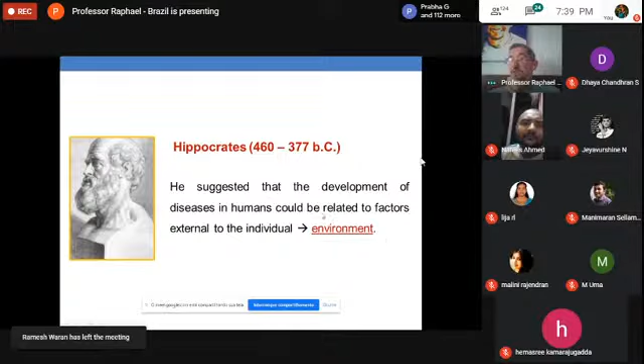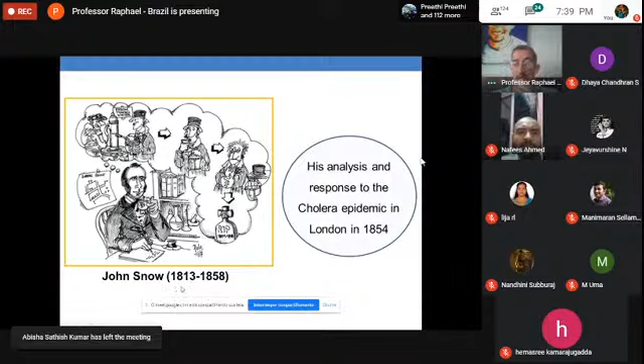After that, we have John Snow in England, and his analysis and response to the cholera epidemic in London in 1854. He's the father of epidemiology, and his hypothesis was that during the cholera epidemic in London, the Broad Street pump, the water pump in the middle of the city, was contaminated. It's important to note that in the 1850s they did not know about microorganisms, but with all his study he could suppose, as his hypothesis, that the water was contaminated by something.

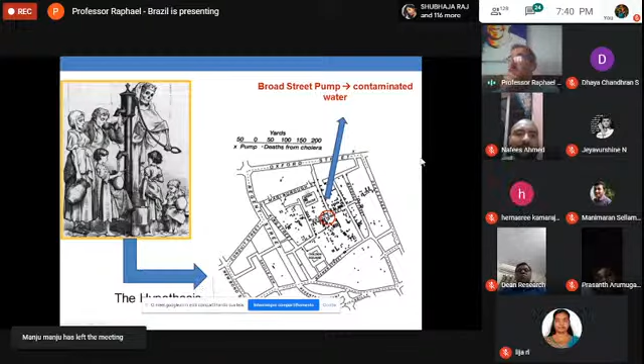With that, what we got is some epidemiology studies, and multiple factors like environmental, social, and economic ones are related to a lot of diseases.

In the world, there are more than 2.5 billion people who do not have access to sanitation, and of this, 71% live in rural areas. As a result, we have a lot of waterborne diseases that affect mainly the poor regions of the world, for example in Latin America and South Asia, including indigenous and rural populations.

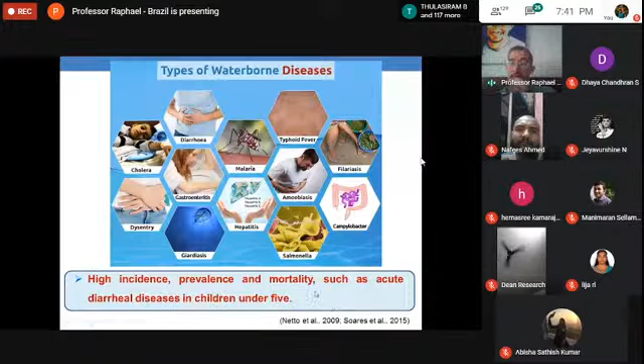All these things, the poor sanitation and no access to water or wastewater treatment, result in a lot of types of waterborne diseases, like diarrhea diseases, cholera, gastroenteritis, giardiasis, and so forth. These have high incidence, prevalence, and mortality, such as acute diarrhea diseases in children under 5. The waterborne diseases affect mainly children under 5 years old.

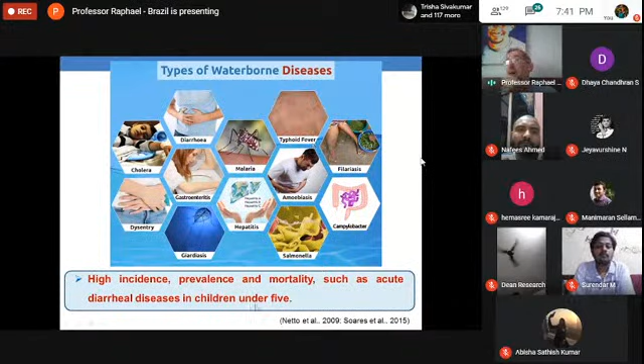Researchers say that waterborne diseases have physical, economical, social, and environmental impacts for the entire community, as well as chronic impacts on children's mental and physical development. For children under 5 years old, these impacts are very important. So this is the more important thing about water treatment.

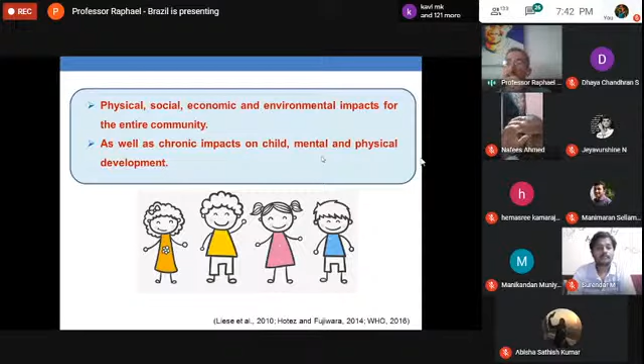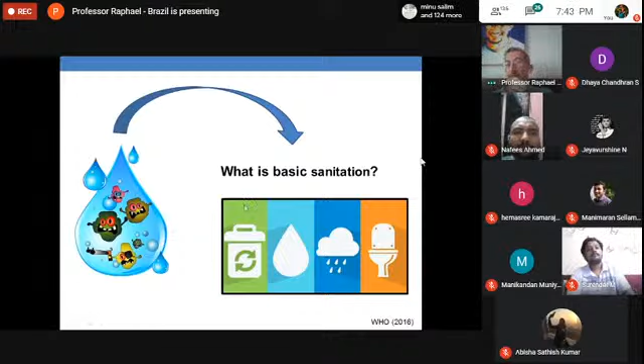The access to secure water, in quantity and quality. So what is basic sanitation? Basic sanitation has four things: access to water, wastewater treatment, access to drainage of rainwater, and access to solid waste management. All these things are fundamental to good health and to social and economic development.

So adequate sanitation with good hygiene and safe water, what we call WASH. The World Health Organization said that these three things, sanitation, hygiene, and safe water, are important for all people. They are human rights. That is the most important thing to know - sanitation, hygiene, and water. They are human rights.

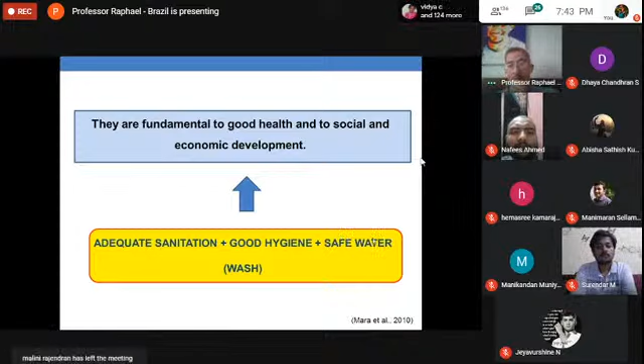So an ideal solution to problems related to waterborne diseases is access to water. This access to water needs to be universal, cheap, safe, and constant.

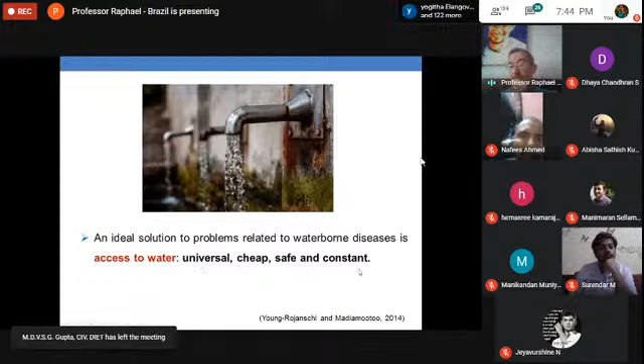So we focus on more simplified and viable technologies. This technology needs to be economically, socially, environmentally, and culturally suitable in rural areas, as communities are smaller and households are far from each other. So we have like 4 or 5 or more technologies that are viable for this kind of community.

So the priority purpose is to find a technological solution for household water treatment that is suitable, sustainable, and can be maintained by their users with little technical support. Why is this important? Because we do not want the technological solution to be abandoned in the future.

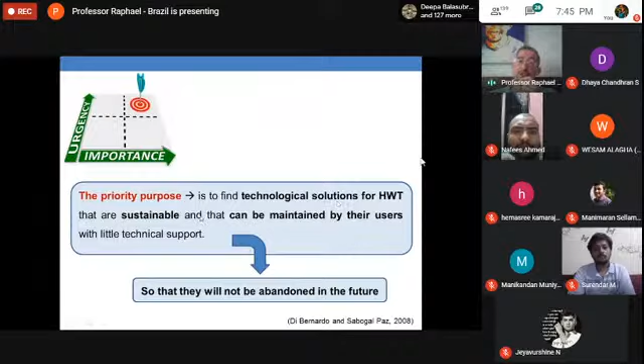Why do we say that? Because we have a lot of technological solutions where the solution is so complex that the user does not use it, so they abandon the technology. So for us, that is not important, that's not good. We need a technological solution to be sustainable over time.

The second part is the slow sand filter, a theory about that. Among the widely accepted technologies for water treatment in small communities is slow sand filtration. This slow sand filtration originated in Britain in the 19th century and was widespread in Europe and America.

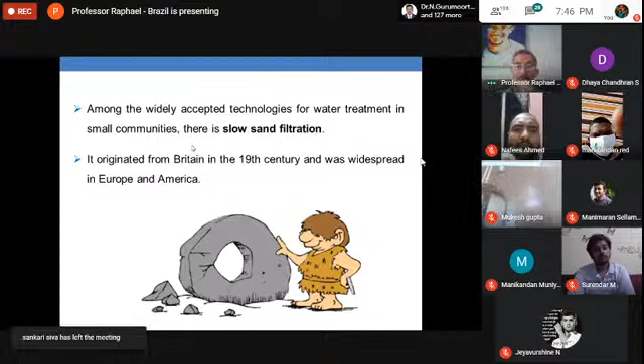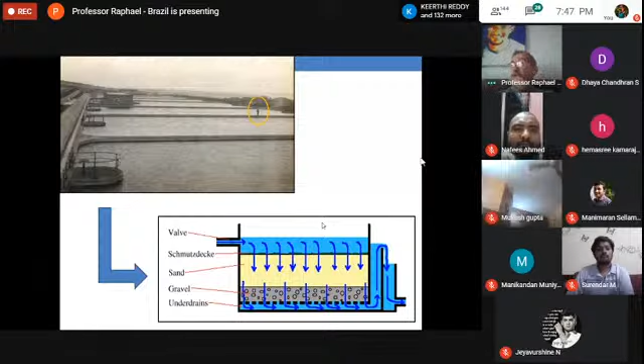Here we have a picture on top. The slow sand filters are big because the flow rate is very low, but it's very simple to operate, and the slow sand filter can bring us very good treated water quality. At the top of the filter we have the Schmutzdecke, a biological layer, and the raw water comes in at the top, flows through the sand, the gravel, and the underdrains, and goes out treated. So it's a very simple technology that can be used for small communities.

The advantage of this slow sand filtration: it has a 0.6 to 1 meter bed of sand used to improve the quality of water with removal of turbidity and pathogens mainly. It has simplicity of design, construction, operation, and maintenance, and it is capable of promoting effective removal of pathogens and particulate matter, especially due to the trapping in the smaller sand grains. The sand has very small grains, so the pathogens become trapped inside the sand grains.

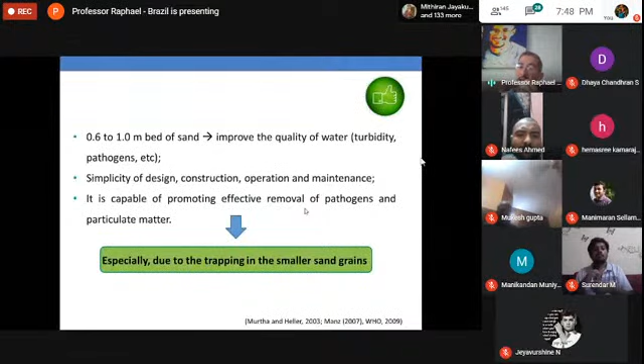Some disadvantages of this technology: it requires good quality raw water, sometimes we need pre-treatment steps. The flow rate is very low, 0.1 to 0.4 cubic meters per square meter per hour, so for a big population it needs a large area. But for smaller communities, this technology is very important.

We usually need days to weeks to develop the biological layer, called Schmutzdecke. Consequently, we need to improve the efficiency during this period of time. We need to know that slow sand filtration is like 90% biological, so the microorganisms in the biological layer need time to improve the efficiency of the filter.

Community scale systems are technically more complex, more professionals able to implement, and cost more, and also require a high degree of cooperation among individuals in the community. So it's a technology that can be used at community scale, but it requires a high degree of cooperation.

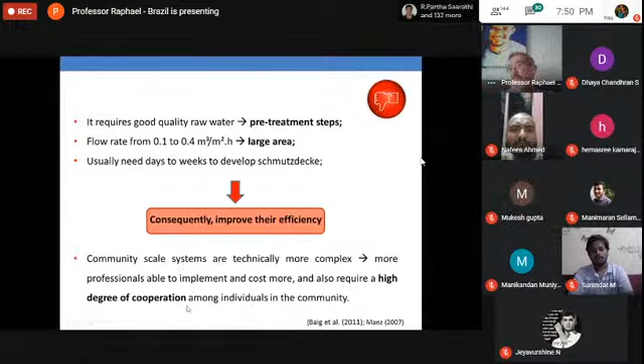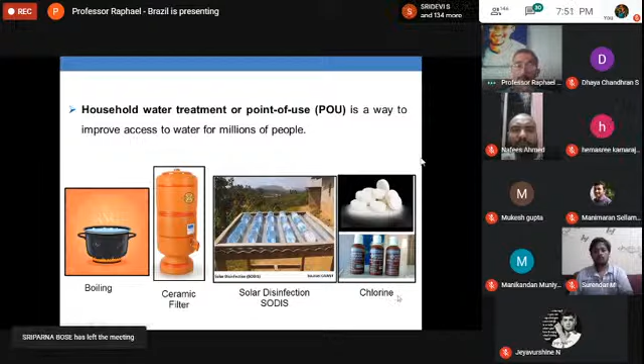Another household technology is the household slow sand filter, called the Biosand filter. The Biosand filter is an intermittent way to improve water quality, and it's very similar to slow sand filtration. The Biosand filter was first constructed by Professor Manz in the 90s, a professor at the University of Calgary in Canada. He brought this household slow sand filter.

It's very simple: we fill the filter with raw water, the water passes through a diffuser plate, then through a column of sand and gravel, and goes up to an outlet pipe, and the water is treated.

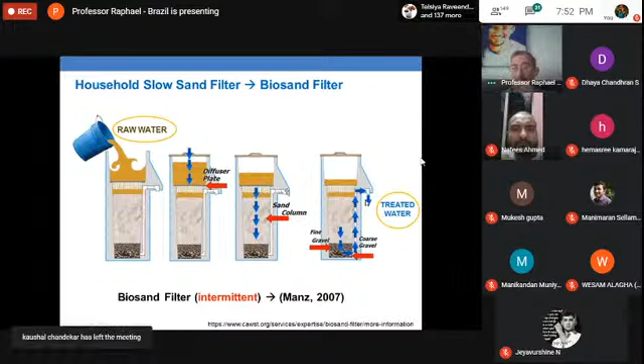What are the mechanisms acting for pathogen removal? The first one is predation: in the top of the sand column we have a biological layer, so we have predation there. We have trapping, because some pathogens are larger than the sand grains. Some pathogens can be adsorbed - so adsorption. Some pathogens get stuck in the sand grains, and natural death, because here the pathogens do not have enough food or enough oxygen. So these four are the main mechanisms acting for pathogen removal.

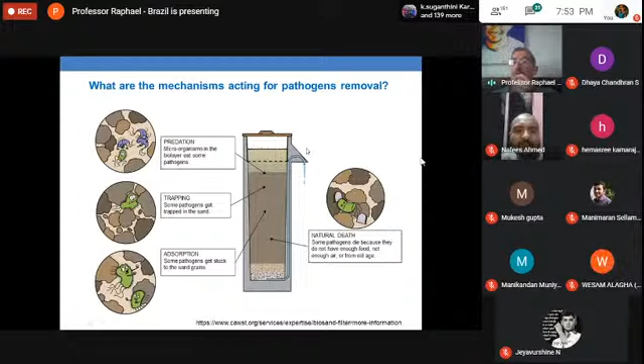So this is a slow sand filter with intermittent operation. The Biosand filter has a diffuser plate that protects the top of the sand and the biological layer from being damaged. At the top of the sand column we have the biological layer. We have filtration sand that removes pathogens and suspended solids from water, specially selected and prepared to treat the water well. This is the most important part of the Biosand filter - the filtration sand.

The grains need to be very, very small. At the bottom we have the separation gravel and drainage gravel to drain all the water and support it - the separation gravel prevents the sand from going into the outlet tube. We have the outlet tube here, and after that the safe water storage.

This part is very important too, because after the Biosand filter we have very good quality, drinkable water. But sometimes the safe water storage here is not clean - so the water is safe, but sometimes the storage is not safe, it's unsafe. So this container used to store the treated water needs to be very clean, so as not to contaminate the water again.

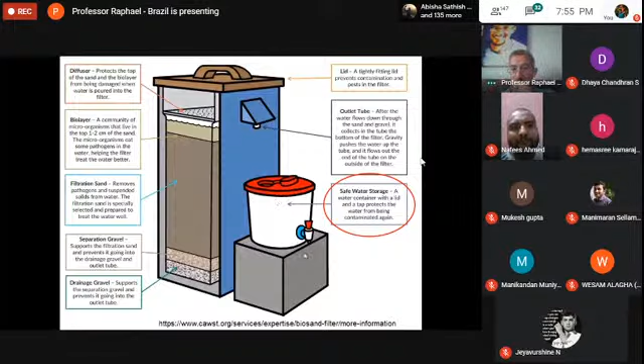The Biosand filter treats domestic water at 20 to 60 liters per day. It contains about 0.4 to 0.55 meters of sand above a gravel under-drain.

For practical household use, it's important, as Professor Manz designed, that the total height of the filter makes it easy for any adult to fill the Biosand filter with water. The outlet pipe collects water below the under-drain and extends along the filter wall until approximately 5 centimeters above the media surface, so the filtering bed is always kept saturated. A diffuser plate above the water level protects the biological layer from damage.

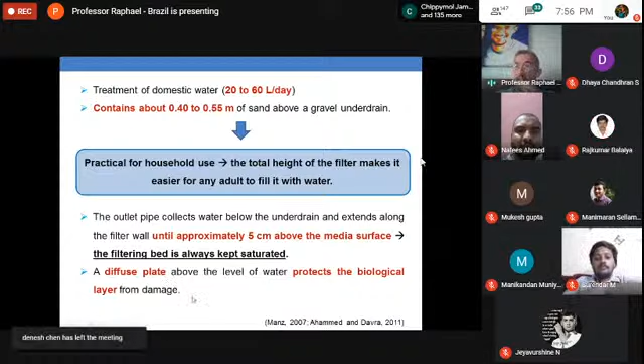The advantages of the Biosand filter: construction with local and simple materials, low cost. Here in Brazil, the cost of the Biosand filter is about $25.

Affordable and durable, operation and maintenance economically viable, and can be carried out by the resident. This is very important. The Biosand filter can be built, operated, and maintained by a layman with few hours of training.

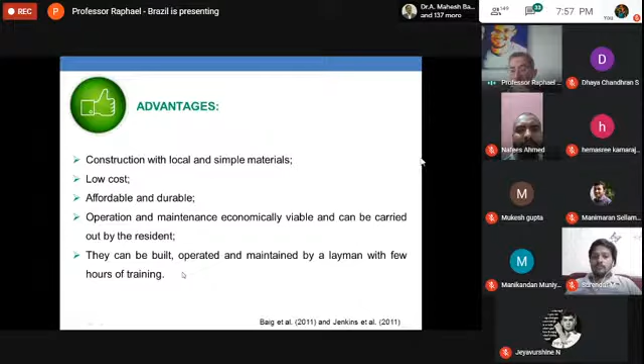Some disadvantages: the size of the sand grains affects filter performance, and sometimes it's difficult to find sand with the right grain size. A disinfection step is recommended, especially when the raw water presents high turbidity.

The presence of the biological layer formed in the first centimeters of the sand filter media is the same discussion as with slow sand filtration. So we have a biological layer here that needs time to mature enough to have good efficiency.

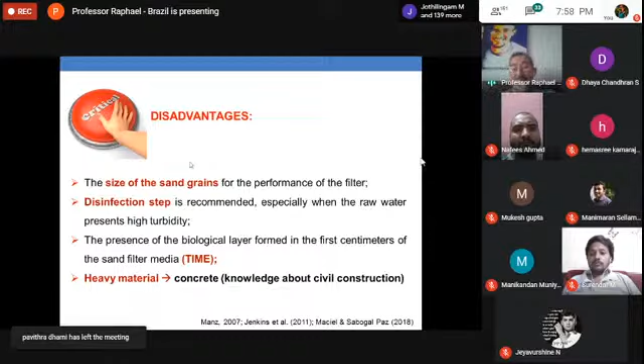Also regarding materials, Professor Manz made the Biosand filter in concrete, so people need to have knowledge about civil construction.

But here in Brazil, we have some studies on Biosand filter performance. There are 3 or 4 groups here in Brazil that work with this, and I brought some results that our partners have on the performance of slow sand filtration at the Biosand filter.

So, intermittently, we need to fill it with water 1 to 4 times a day. We have a maximum filtration rate of almost 10 cubic meters per square meter per day. The Biosand filter needs a pause period of a minimum of 1 hour.

The efficiency increases with temperature - this was a very good result - and it depends on the filter maturation. But the Biosand filter achieves turbidity below the value recommended by the World Health Organization, that is 1 NTU.

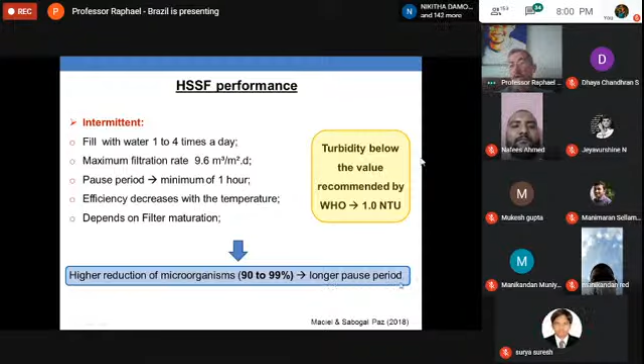When the Biosand filter is working intermittently, it has a higher reduction of microorganisms linked with the longer pause period. When the Biosand filter is working continuously, it depends on constant input and controlled water.

So here was a very important thing that we do here in Brazil: we can work the Biosand filter intermittently, or the Biosand filter can work continuously, receiving raw water continuously. This is very important too.

Continuously, it depends on the raw water quality. The efficiency also decreases with temperature, and it depends on filter maturation too.

The reduction of microorganisms can reach 99.9%, so this filter is more efficient compared to an intermittent Biosand filter. And regarding maintenance, when the filter needs maintenance, the filter needs time to recover its performance.

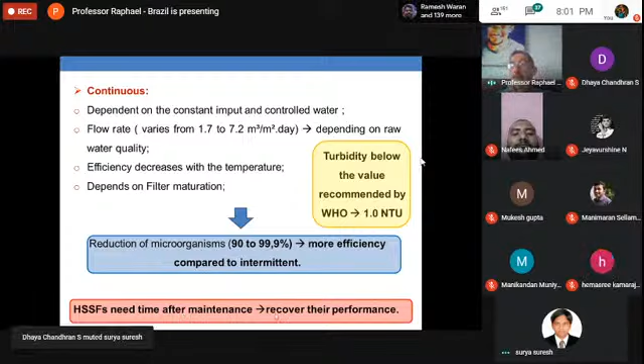What is filter maintenance? We have a biological layer on top of the sand bed of the Biosand filter, and when the daily production is not as desired, we need to clean the filter.

Here with my partners, we have two technologies of Biosand filter. We can put a non-woven blanket on top of the sand bed too. When we have a non-woven blanket on top, we just remove the blanket and scrape off the solids.

After that, we wash the blanket and put it again on top of the sand in the Biosand filter. If the Biosand filter does not have the non-woven blanket, we need to stir the surface area of the filter with our fingers, wait for the sand to settle for 1 minute, discharge the supernatant water, and repeat the process until the water is clean. So the maintenance is very important, and it's very easy to do.

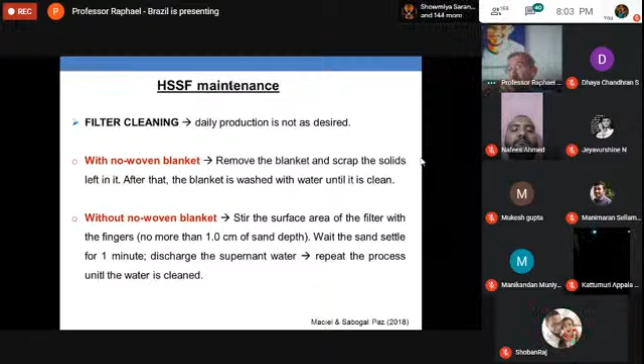So the Biosand filters have been modified. Our partners here in Brazil work with a lot of modifications, either to the construction material, the depth of the sand bed, or the sand grain size. So here we work with PVC pipes instead of concrete.

We work with PVC pipes and fittings, so it's very easy to get these pipes and fittings in hardware stores, and it's cheaper. We have some studies in fluid dynamics.

We have also worked on research with a plastic float valve to maintain the water flow rate through the filter. We have worked with different depths of sand bed, with non-woven blankets, and with different diffuser plates.

The Biosand filter has been part of research in intermittent and continuous flow, with different sources of water. Some studies use river water, some use groundwater. So with different kinds of water, the filter has different kinds of efficiencies, which is very important for research too.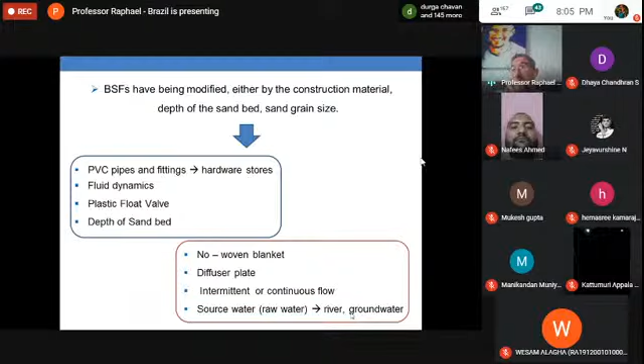But in the end, the filter works very well. One important thing about the Biosand filter is that it requires good quality water. In one of my studies, to improve the Biosand filter efficiency, we put in a pre-treatment step.

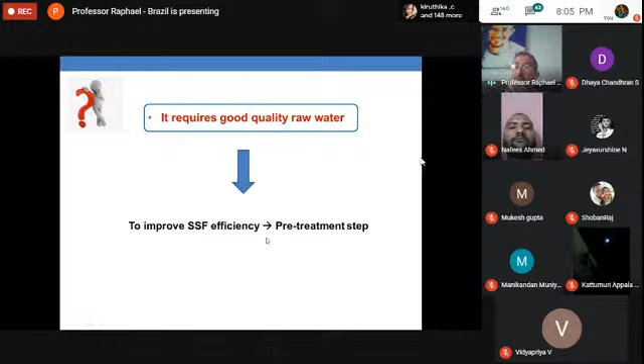So the last part I will talk about today is about household multi-stage filtration.

So what do we have here? Here we have the household slow sand filtration, or Biosand filter, with a pre-step using a dynamic gravel filter. This kind of technology works well, treating 25 to 100 liters per day.

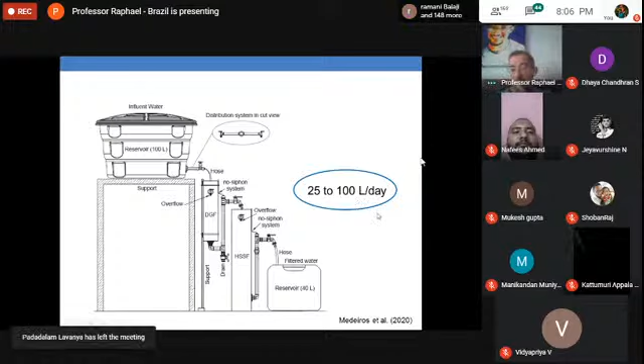The dynamic filter gets very good turbidity removal, E. coli and protozoa removal for this type of filter.

Here's a picture of the dynamic gravel filter. It's very simple: a PVC pipe with 3 layers of gravel - fine, medium, and coarse. On top we put a non-woven blanket. The water goes inside, flows through these 3 layers of gravel, and goes outside through the tap.

At the bottom we have a valve used to clean the filter media. It's also very simple to clean this kind of filter - we just close the tap, fill the filter with water, and open this valve. This cleans all the filter media.

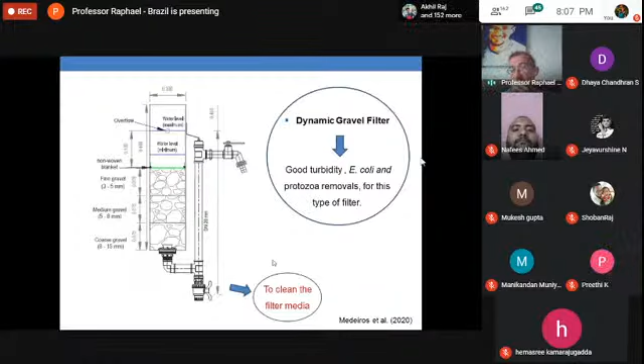So this was the pre-treatment step, and after that we have the slow sand, household slow sand filter, called Biosand filter. Here we have a fine sand - this is the most important thing, the characteristics of the fine sand: its size, the uniformity coefficient. These characteristics are very important.

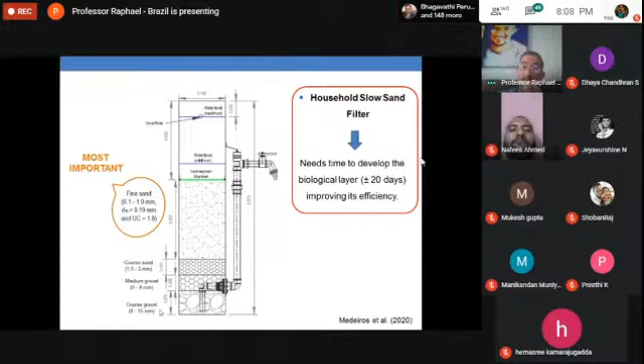This filter had 25 centimeters of height. After that we have coarse sand, medium gravel, and coarse gravel - these three layers are the support layer, just supporting the fine sand column. So the water enters and goes inside the filter, passes through the sand, passes through the gravel, and goes outside.

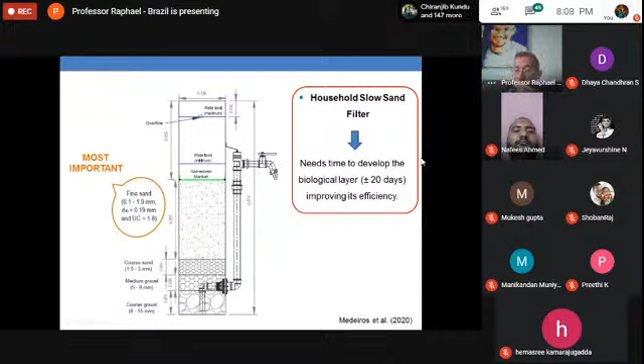So the results we got with the household multi-stage filtration: we got turbidity removal more than 60%, 1.5 log which is almost 99% of E. coli removal, and more than 99% of protozoa removal. We work here with Giardia and Cryptosporidium cysts.

The operation time is linked with the filter ripening parameter. The operation time influenced the E. coli and protozoa oocyst removals. The non-woven blanket acted as a physical and microbiological barrier, improving E. coli and oocyst retention and turbidity removal. So the non-woven blanket is very important to the filter - it helps a lot.

And the household multi-stage filtration with non-woven blanket is an example of a multi-barrier concept. What is this concept? More than one stage to improve water quality, with gradual removal of particles and microorganisms.

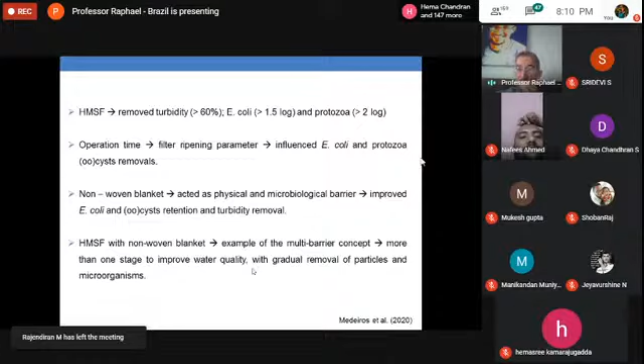I think here are the references. And the most important thing I need to say is to improve water, to improve access to water, to improve quantity and quality of water, we need to work together.